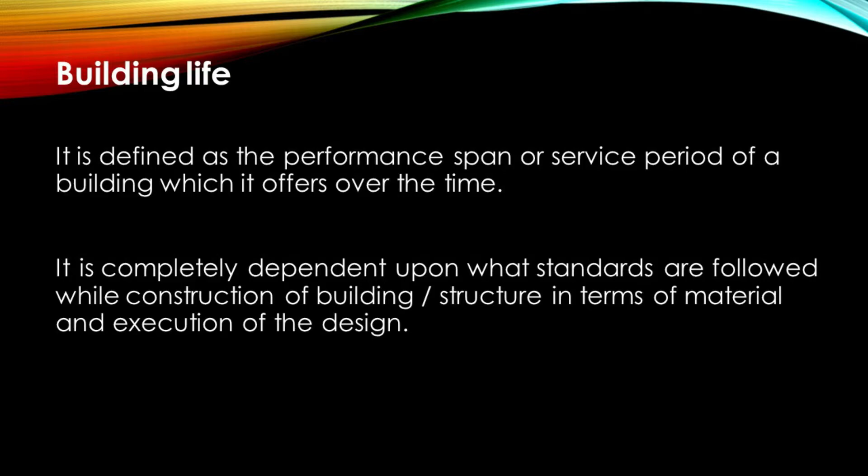But the building life is completely dependent upon what standard we follow during construction and what kind of building materials we involve in our structure. See, everyone wants their building to perform well in all conditions and survive for longer time and give them good shelter for longer time. But the question is, why do buildings collapse?

As I said earlier, the material we choose for construction and the workmanship on the site are the main factors on which building safety is completely dependent, and with that the negligence in technical aspects is also the main reason for any building to collapse. Friends, generally we say that a good building is a result of good construction practices. There are several causes for any building collapse or structural failure, which are discussed and emphasized one by one in this video.

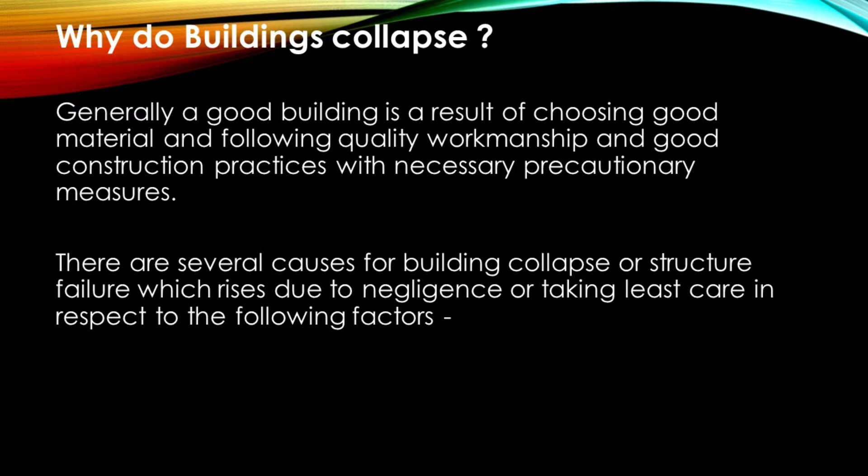Now we shall see what are some of those important factors affecting building stability in this video. First factor is quality of material. See, if not so high standards, at least choose the material like sand, cement, concrete, or what we call metal, which possess minimum requirements as per IS standards. Just do not go for the materials which are available easily at your place, but do check that it must meet the standards to give your building a good life.

Next comes the quality of construction. Please do take care while preparing the concrete, that is, good monitoring during batching, mixing and placing of concrete in position. And make sure that the scaffolding is stable and good during the construction, which otherwise causes a huge loss during the construction. And try to hire skilled laborers for proper bar bending and all.

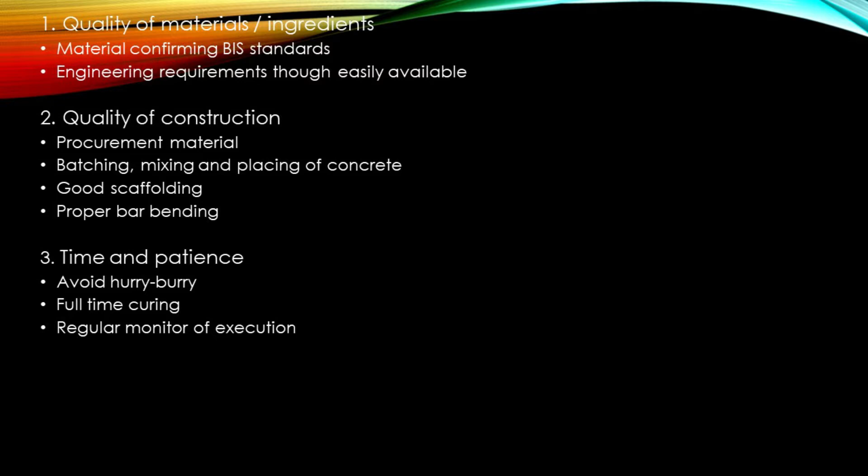And next comes the general aspect of the building safety. See, if we are constructing any building, we need to be very patient. Do not go for urgent completion of work, what we say in general is hurry work in timing. This leads to technical failure, causing the building life to become less.

Now the next factor is type of soil and footing size. See, different soil types offer different internal energy to act opposite to the load they are getting on them, meaning the load the soil is getting, and depending upon that the footing size is decided. Improper footing size causes the settlement of the structure, thereby leading to the collapse of that building.

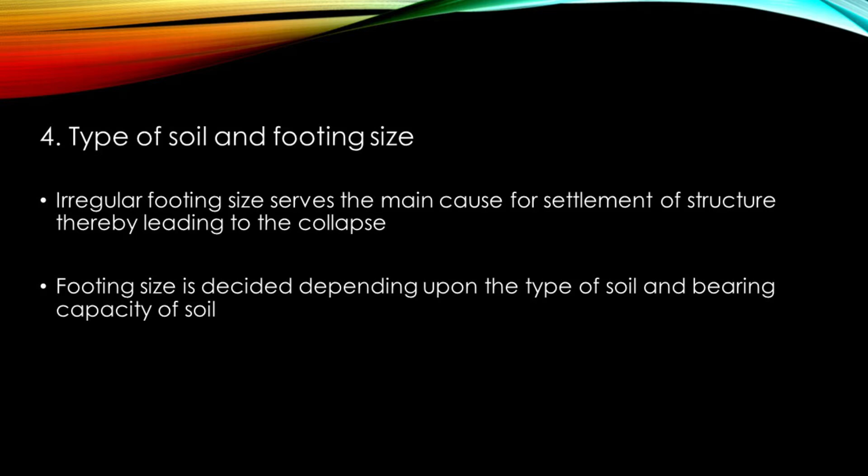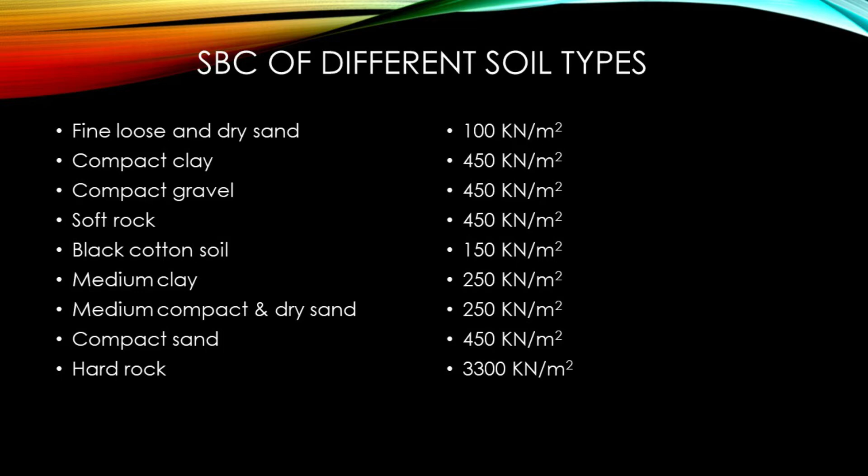Here I have given some soil types and their safe bearing capacity, which plays a very important role in the structural design of a building. Here we can see that for fine, loose and dry sand, the safe bearing capacity of soil is 100 kN/m², and similarly for compact clay it goes 450 kN/m², and for compact sand the SBC is 450 kN/m². If the strata of the soil on that particular site is hard rock, it offers the maximum safe bearing capacity. It is 3300 kN/m².

Next factor is toppling of structure. Toppling means the structure or the building sways on one side.

See, toppling of structures takes place due to the placing of slender column along the longer side of the span, which is against the BIS standard. Now here, what is slender column? Slender column is one in which the longer side is twice or more than twice of the shorter side. And if such columns are placed along the longer side of the span, there is chances of toppling of the structure, which is proved in several case studies.

In addition to this, as we discussed earlier, if the soil is loose and silty, it undergoes intense densification under sustained load over longer period, then also the toppling of structure takes place. Along with this, if there is prolonged waterlogging on the site, it weakens the soil around the basement wall and foundation, which thereby causes the foundation distress, which declines the service life of a building.

Now next factor is good bonding between columns at supporting ends. So how do we ensure it? This is achieved by proper lap joint in columns. If otherwise, it goes against the BIS code, disregarding the IS standards and affecting the structural integrity. So therefore, it becomes important to see that there is good bonding between column at supporting ends.

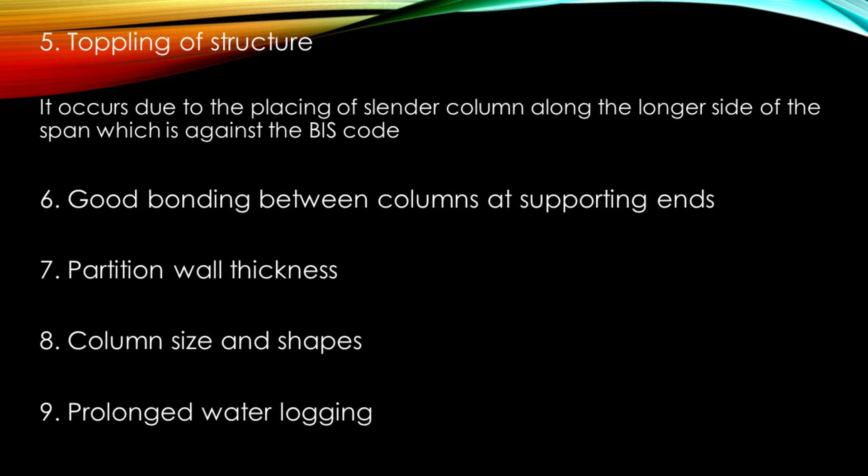And most importantly, we should not provide abrupt column size and shapes, but rather the column size and shapes should be adjusted with the wall thickness and position. And also it is recommended to make sure that there is proper execution of column beam junction, that is, provide L bends in beam and column junction, which gives good adherence or bond between both column and beam. And if we are talking about steel, it becomes important to know about steel usage.

Excess of steel is also very dangerous, especially at the junctions, because this causes the building collapse by sudden burst. And also use covering blocks to avoid rusting and corrosion of steel, and to protect steel from short circuit and fire accident in the building.

And even the main reason for building collapse is improper design, or what we call bad structural design. And sometimes even if there is good design or proper design, due to the lack of communication between the designer and the execution worker, there is chances of damage to the building.

And in addition to that, being an owner or contractor, we should avoid some mistakes on the site. Like we should not follow the practice of filling the basement with construction waste. Here the construction waste is nothing but the material we get from the demolished building. So we should not do that. If we practice such kind of things on site, it causes unnecessary load to the foundation and thereby causing the dampness in the structure over longer period.